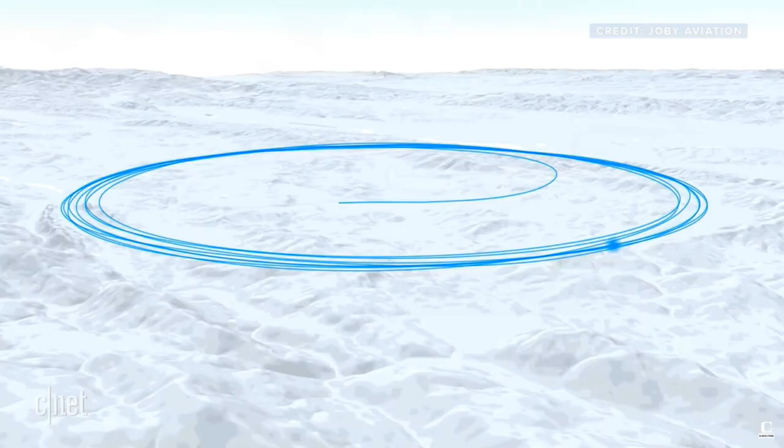Today is a really big day for electric flight. Vertical takeoff and landing, it all happened here.

Just incredibly proud to be a part of this team that's put this together. Both on the flight test side, we have an amazing flight test team, but also just the incredible engineering talent we have. When you've got exceptional people like we have at Joby, then you do exceptional things.

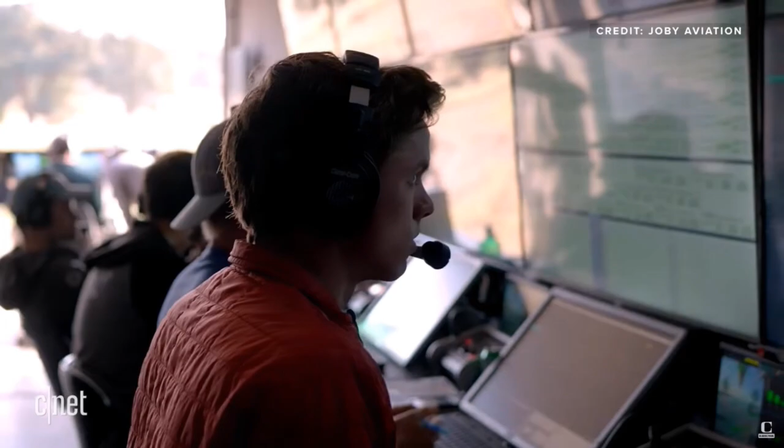We've redefined possible here at Joby. We've shown that with the right people and the right team and the right technology, we can do what everyone else thinks is impossible.

Now, a new transportation reality may be knocking on the door. We're just at the dawning moments of a transportation revolution, which is going to take us into the skies for our daily mobility. This is the electric air taxi from Joby, designed with commuting in mind.

The plan is for customers to be able to book one the same way you'd book an Uber, skip the traffic, and fly. What would be a 49-minute taxi ride from Manhattan to JFK Airport, instead just 7 minutes.

These are built for up to 4 passengers with a range of 150 miles, going 200 miles per hour. And the way they're manufactured, they're actually 100 times quieter than a helicopter.

What's the difference between this and a helicopter? It's dramatically safer, because it has 6 propellers, and each propeller is driven by a separate motor, by a separate inverter, by a separate battery pack, each layer on layer of redundancy.

The air taxis will be manned by commercial pilots. And with a vertical takeoff, they could land on rooftops or parking garages. The electric batteries take just 30 minutes for a full charge, hopefully allowing for cheaper flight costs.

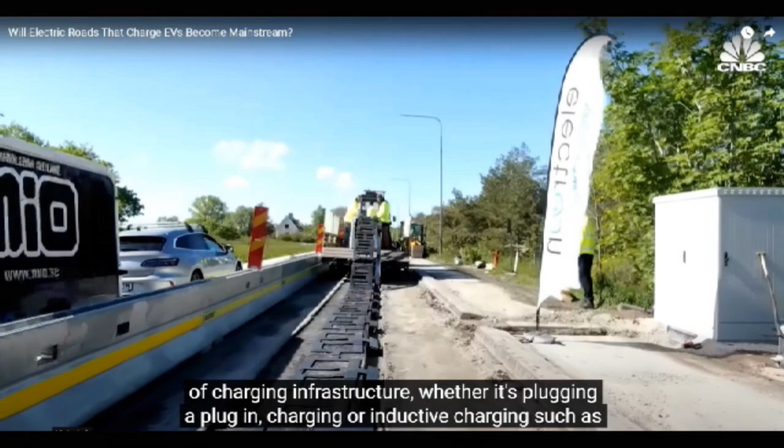such as this project, and create a cohesive environment for people. CNBC explores how electrified roads work and whether they'll become a widely adopted charging solution for EVs.

Electrified roads work a lot like the wireless charging that's in most smartphones. With a transmitter coil in a phone and a wireless charger, a magnetic field is created in between, allowing the phone to receive between 10 and 15 watts of energy without any physical connection.

Now multiply that amount of power by about 3,000, bury the coils under about 4 inches of pavement, add a wireless receiver to an EV, and you have a working dynamic electrified road.

EVs don't currently have receivers allowing a wireless charge, but it's relatively cheap and easy to add, and manufacturers could start to integrate this technology in the future.

This approach is really one that can charge vehicles of any type, meaning vehicles that are buses or vans or passenger cars or trucks, but it can also charge a vehicle while either driving or while standing still.

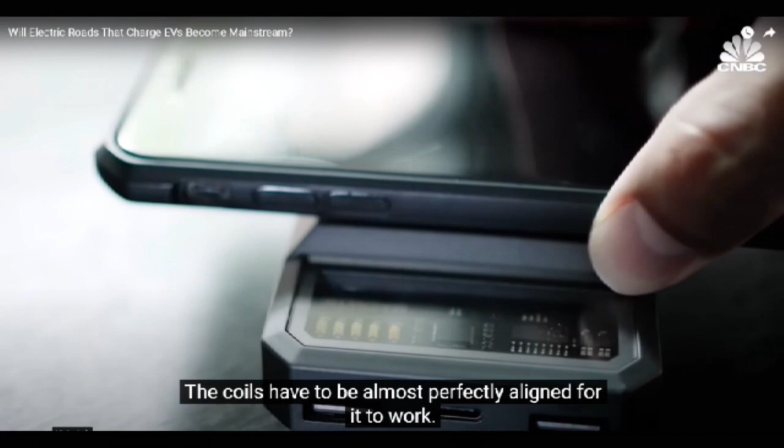For a phone to charge wirelessly, the coils have to be almost perfectly aligned for it to work. But with an electrified road, the technology allows for more leniency, so precise alignment of the coils isn't necessary. So you have a higher tolerance of moving on the road, and having an air gap that's tolerable, which makes it practical for using in everyday operations for cars.

So it is much more of an efficient system, I would say, an optimal system compared to the phone charger, which is more simplistic.

These systems typically connect to the electrical grid. However, electrified roads can also be hooked up to battery hubs, connected to solar panels, or other sources of clean energy, which would make the process greener and allow for electric roads in disconnected areas, like on an interstate highway.

And that's where we see a lot of the benefits as well, both in terms of the environment, but also in terms of economic development. And that would definitely also release some of the pressure on the grid.

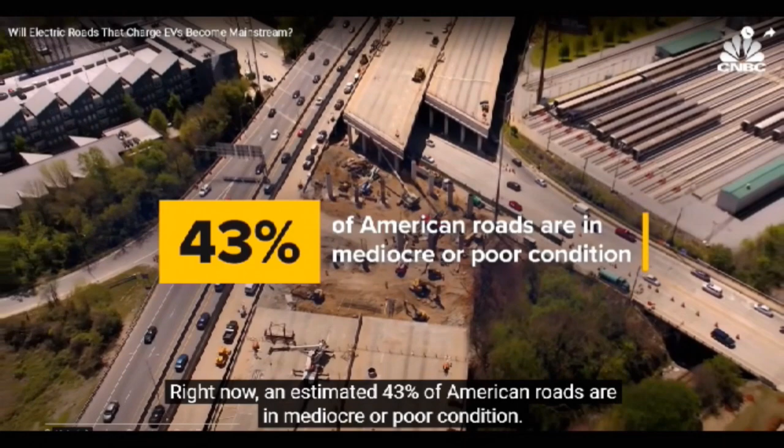Right now, an estimated 43% of American roads are in mediocre or poor condition, and one report showed there's over $750 billion worth of backlogged road and bridge repairs. Some view this as the perfect chance to innovate.

As we rehabilitate a lot of the infrastructure, we know the conditions of our assets here in the US. It's an opportunity to really think about this technology, and it will be much more cost effective to be able

to install and implement this as we, as I said, do more major rehabilitation of interstate highways, tollways, and so forth. Electrifying roads would only add to the hefty price of road repair and maintenance.

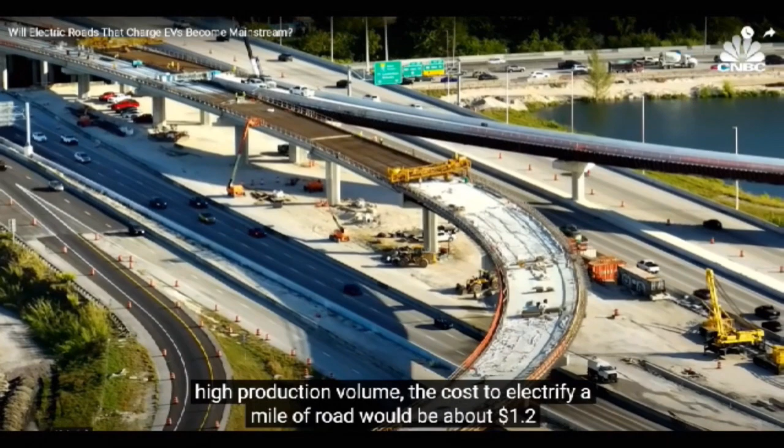Electreon, one company leading the charge on electrified road technology, estimated that at a high production volume, the cost to electrify a mile of road would be about $1.2 million. While reconstruction costs per mile of a road can already cost anywhere between $1.5 to $11 million depending on condition and population density.

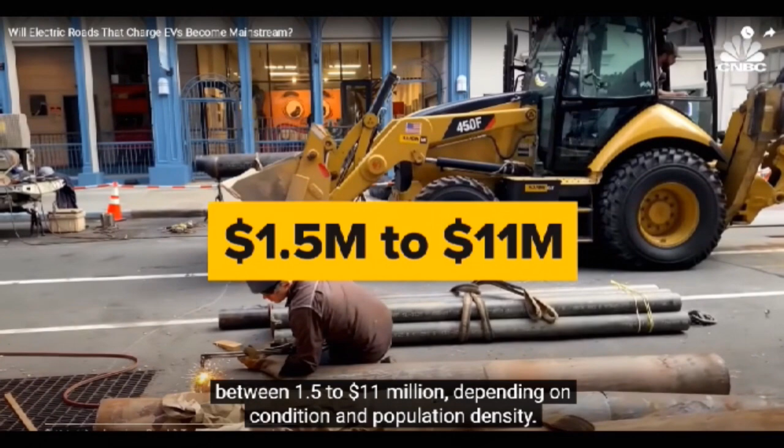Sweden is one of the pioneers implementing this technology in an attempt to reduce the nation's impact on the environment. It has already piloted 4 unique electrified road projects, testing out different electricity conduction techniques.

We have kind of tough climate goals in Sweden. That is, we have to reduce our carbon footprint 70%. If you look at how it looked back in 2014-2015, the battery capacity wasn't like it is now.

So for the heavy transport, we have to look into other solutions. And that was why we went into e-roads.

And now the EU will require all new cars in member states to be electric starting in 2035, adding pressure to improve EV infrastructure. Electreon has several pilot programs in operation, including projects in Israel, Norway, and Italy, among others.

One project in Sweden, which connects the airport to the town of Visby, cost about $10.5 million and was almost entirely financed by the Swedish Transport Administration.

It also has some commercial programs in the works, like its bus project running in Berlin, Germany.

Once all stages of the project are complete, it will have 2 static charging stations and 1 kilometer of dynamic charging, which adds an estimated 2 to 4 kilometers of range to the battery. Electreon is also working with the state of Michigan to pilot a dynamic electrified road in Detroit within the next year, which would be the first in the US. The project costs about $6 million, with the Michigan DOT spending about $1.9 million and Electreon covering the rest.

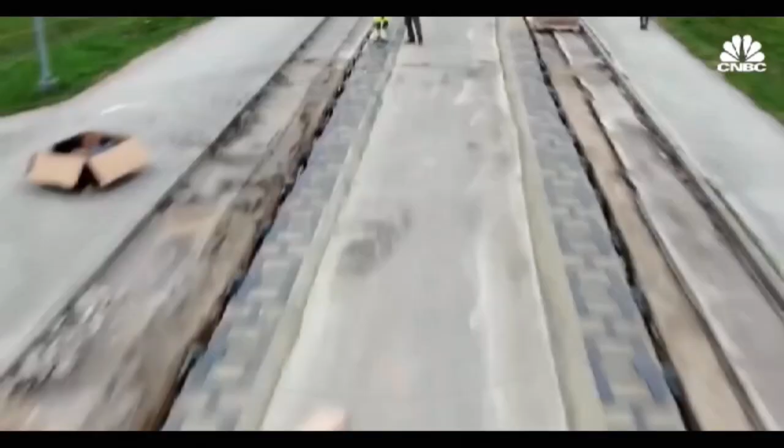While the EV market is growing at rapid rates, charging infrastructure is inherently needed to support that growth. There were about 87,000 electric vehicle charging ports in the US in 2019. Now there's over 160,000 nationwide, nearly doubling in just 3 years. But studies show the US needs 8 times more charging stations by 2030 to handle the coming wave of EVs.

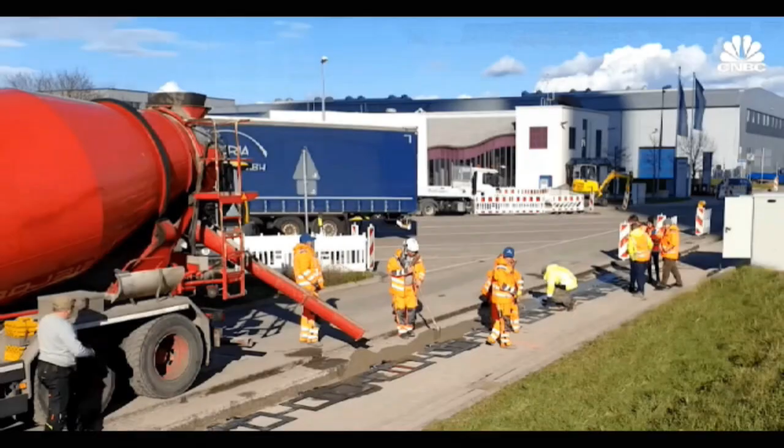But right now, the vast majority of working electrified road projects are temporary, either case studies or pilots. The important thing is that the technology is here, it's there for commercial use and deployment. And so we're working with the right entity to first do these pilots where you get all the ecosystem together, from the vehicles, from the road construction, from the public authorities, and getting the permits and all these things, and the use cases. Once we put that together, then you enable a platform to grow in the state, in the city, in the country.

It would also be extremely costly to electrify every road, so while it likely won't be a regular road replacement, it could fit well in certain target areas like exit ramps, intersections, and high-traffic streets. We don't view 100% of roads being electrified, but we definitely see this technology being viable, both financially and also essential in rural areas where we might not have a lot of charging stations, or what we call charging deserts.

I expect that we'll have focus on certain regions where this is widely adopted in a city for commercial fleets. And I think in 10 years, I foresee a scenario where we also have intercity roads between regions that have electric corridors. We're gonna rock down to Electric Avenue, and then we'll take it higher.

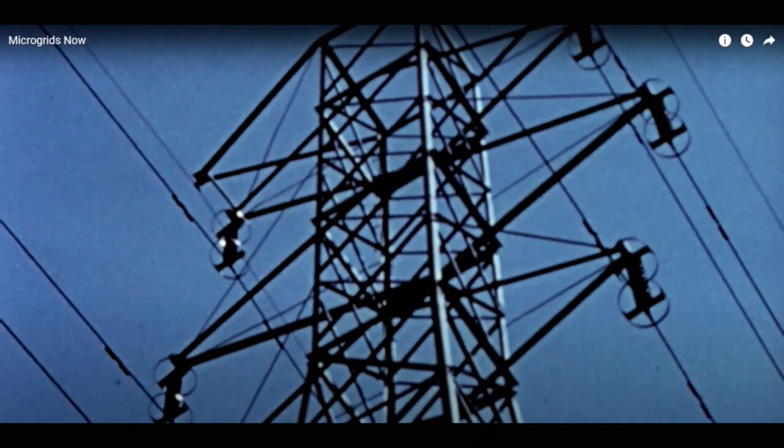The 1950s was a decade of breakthroughs for America. The first computer modem, the first transistor radio, and most of the transmission towers we rely on today for electric power were built in the 1950s. The life expectancy for this national network of towers was approximately 50 years. Our grandparents' grid system is way past its prime. It's unreliable, dirty, and expensive, and it can't handle the demands of the 21st century.

It can't handle threats of cyber warfare. It can't handle extreme weather events. It can't ensure that critical facilities like hospitals stay functioning when the lights go out. One transmission failure can ripple through many communities. Our traditional grid system also fails to handle the increasing demand from new technology. Now is the time to reimagine our electric systems.

One way to power into the future is with microgrids. Across the U.S., small-scale power networks called microgrids are emerging as the smart solution to our failing national grid system. By integrating multiple renewable power sources like solar, wind, and battery storage, microgrids can maximize efficiency and ensure uninterrupted power. What's more, these revolutionary systems can address climate change and help us transition from fossil fuels to clean energy without being disruptive.

We need microgrids today because our grid is brittle and it needs to be brought into the 21st century where we're facing real climate risks, real disruptions. We have a pathway to clean energy and to distributed energy that microgrids enable.

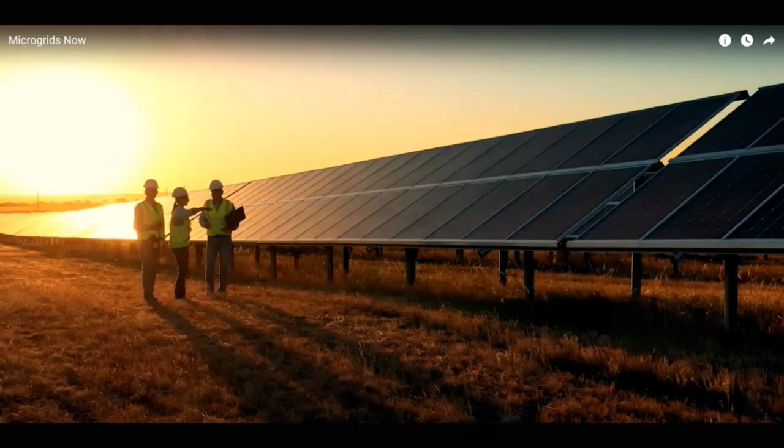The thing about microgrids is that because they're deployed at the local level, they also provide high-paying, good quality jobs in the communities that need them. According to a 2021 Economic Impact Report by Guidehouse, microgrids powered by renewable energy will generate nearly 500,000 new jobs, 72 billion in GDP growth, and 146 billion in business sales by 2030.

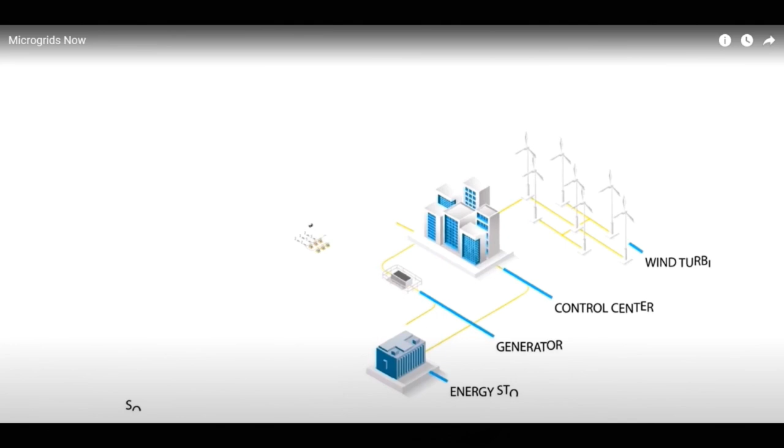Microgrids also address one of the biggest inefficiencies of the centralized system, which is moving power from one place to another. With the central electric grid, significant power is lost when it has to travel miles and miles across transmission lines. Microgrids are more efficient because energy is created very close to where it is used, which, in addition to efficiency, also means savings to consumers.

By some estimates, as much as 15% of the power generated by power plants is lost by the time that it reaches the consumer. Society pays the price for that in the form of higher energy costs and environmental harm. Microgrid technology will enable decentralizing the electric grid, which will have security benefits. Also, communities will feel the economic benefits of electrification.

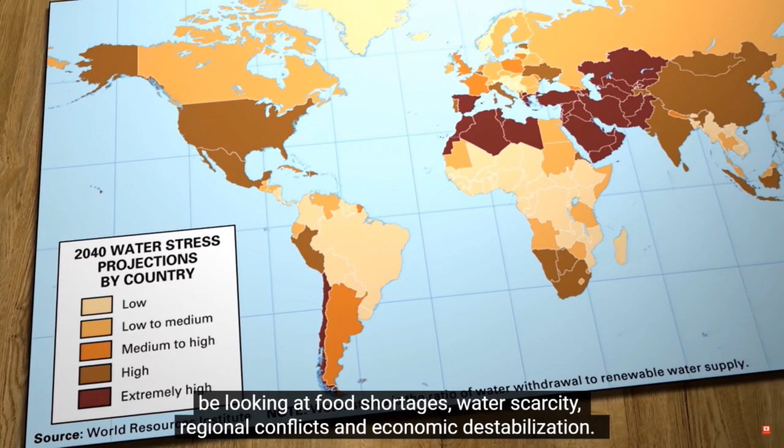If nothing changes at all, then we will quite likely be looking at food shortages, water scarcity, regional conflicts and economic destabilisation. So all sorts of agricultural systems are now being developed and promoted all over the world to try and make the whole thing more sustainable.

And one of the ideas gaining a lot of interest right now is to combine food production with energy production in a concept known as agrophotovoltaics or agrivoltaics, or just APV for short. There's a strong clue in the name, of course, and sure enough, in very basic terms, it means putting solar panels in a field where crops are also grown.

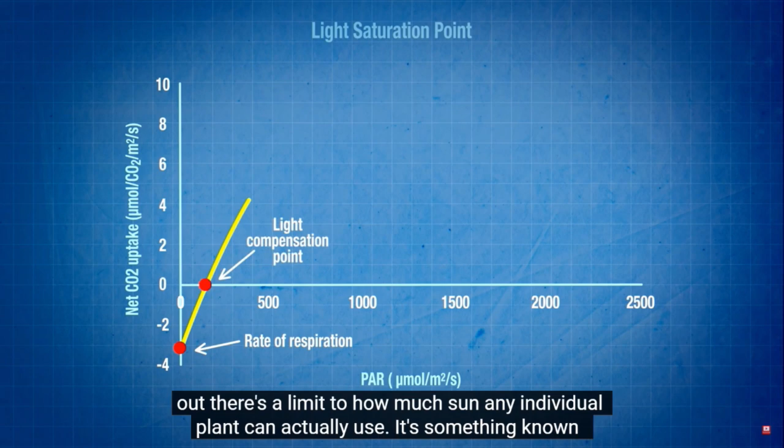So how does it work in practice, and what do we gain from doing it? Well, it turns out there's a limit to how much sun any individual plant can actually use. It's something known as the light saturation point. Any extra light received beyond that point makes no difference at all to the plant's photosynthesis. All it does is make the plant sweat, which makes it more thirsty.

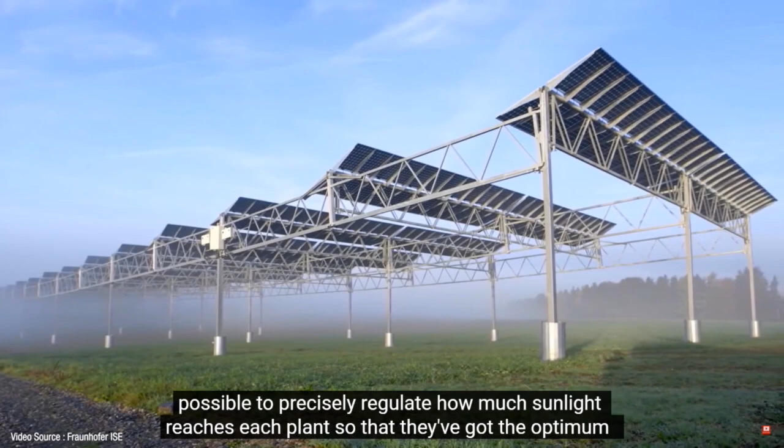So by strategically placing solar panels directly above a crop growing area, it's theoretically possible to precisely regulate how much sunlight reaches each plant, so that they've got the optimum level for maximum growth with minimum water loss. All the excess sunlight that would otherwise be wasted on the plants would then be captured on the upper side of the solar panels to generate energy.

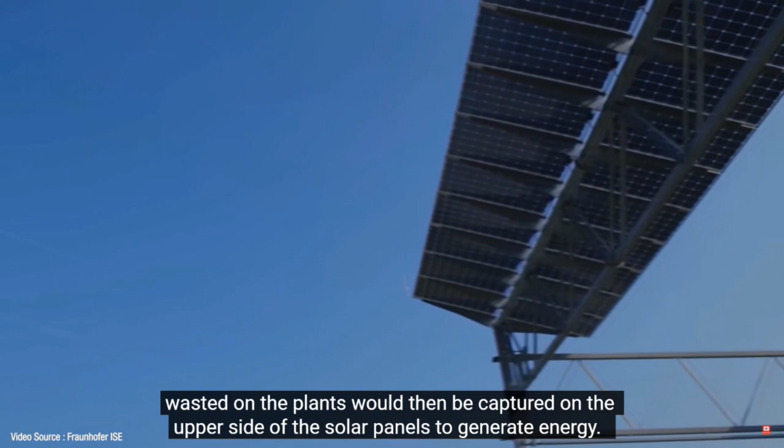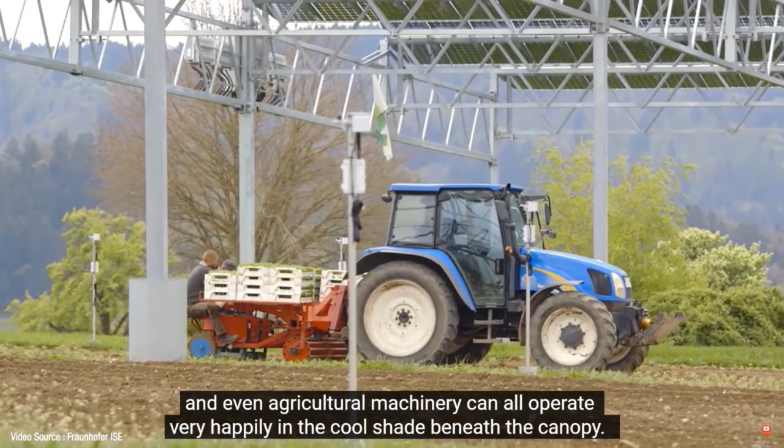And if the panels are raised up high enough above the ground, then livestock, farm workers, and even agricultural machinery can all operate very happily in the cool shade beneath the canopy. And it's not a one-way street either. It's a mutually beneficial, symbiotic relationship.

As the plants grow beneath the panels, they help to keep the panels cool. Ironically, solar panels don't actually like getting hot. It reduces their operating efficiency. So anything that can draw heat off them will help to make the panels more productive.

According to a study by Oregon State University, panels positioned correctly above plants can produce as much as 10% more electricity. And that electrical energy can be used to run the farm with electric tractors and equipment, and to power precision agricultural technology that helps further reduce water usage. All of that obviously reduces the running costs for the farm, and any surplus energy can be stored in battery banks or sent to the grid for consumer use.

So you're effectively using the sunlight twice, to grow cash crops and to generate a second income stream from the solar power generation. Farmers all over the world are finding it increasingly difficult to make ends meet without huge government subsidies. In the USA, that struggle is starting to nudge towards something more like an existential crisis, as trade wars, commodity prices and climate change all combine into a perfect storm of economic disaster.

Between 2011 and 2018, more than 100,000 farms were shut down across America. So the ability to use the land more profitably while still providing crops for the nation is a potential lifeline that could keep many farmers from going bankrupt.

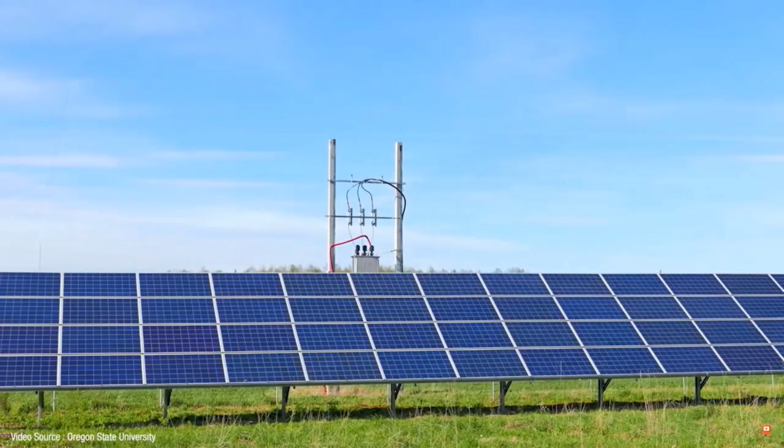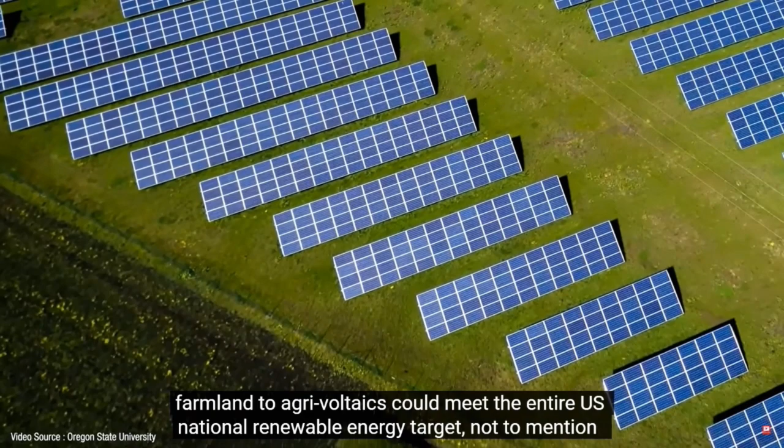And the OSU study also calculated that converting just 1% of American farmland to agrivoltaics could meet the entire US national renewable energy target, not to mention saving a significant amount of water and creating sustainable long-term food production systems. But it's not just happening in America. APV technology is being quite enthusiastically embraced all over the world.

Japan implemented 654 projects between 2013 and 2018, with a peak generating capacity of about 150 megawatts. South Korea currently have about 2 megawatts worth, and of course the mighty China, who, as we've learnt on so many occasions on this channel, never ever do anything on a small scale, installed an estimated 4 gigawatts of agricultural PV capacity just in the 3 years between 2015 and 2018.

Over here in Europe, according to this report by Agora Energiewende and the British think tank Ember, 2020 marked the first time that the EU generated more power from renewable sources than from fossil fuels. Renewable energies made up 38% of the European energy mix in 2020, compared with 37% from oil, gas and coal. So the potential for agrivoltaics here is huge. France is already getting involved, led by the winemaking industry.

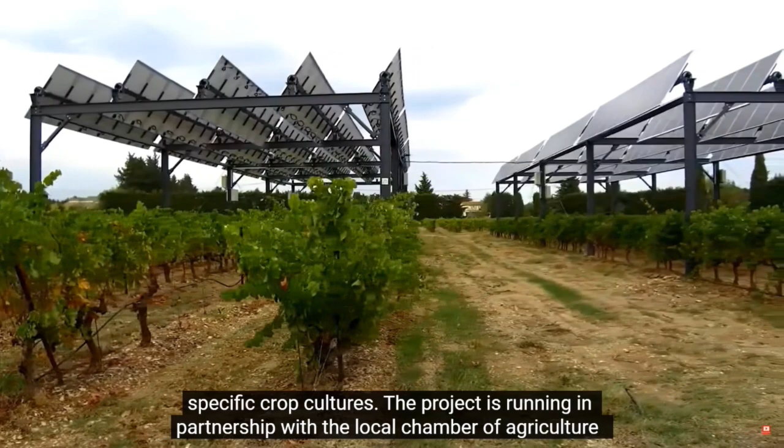Sun Agri, a subsidiary of French solar developer Sun-R, has installed a viticulture agrivoltaic system in the wine growing area of Piolenc in Vaucluse in southeastern France as part of a programme to test how agrivoltaics perform in specific crop cultures. The project is running in partnership with the local Chamber of Agriculture as part of a programme supported by the French Environment and Energy Management Agency.

In a recent interview with PV magazine, a Sun Agri spokesperson said vines are among the crops most affected by the effects of climate change, so it's essential that they be at the heart of our experiments.

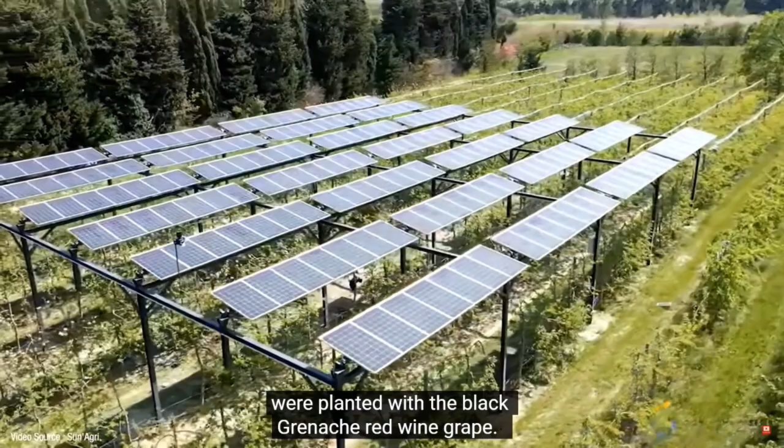1,000 square metres of vines in the test area were planted with the black Grenache red wine grape. 600 square metres were covered by a system of 280 panels with a generation capacity of 84 kilowatts.

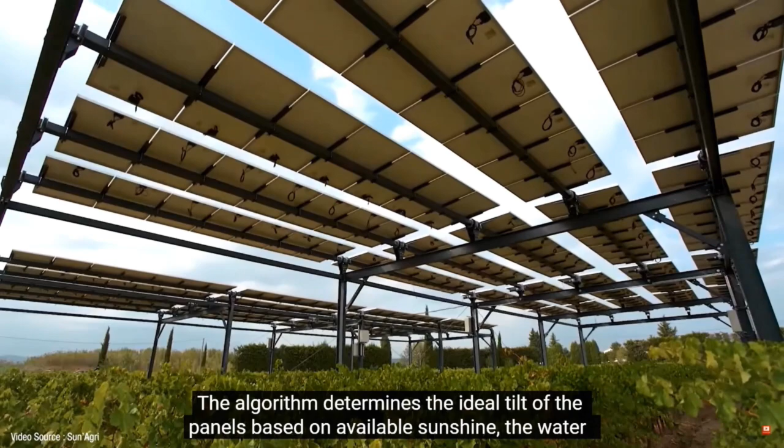The panels were mounted 4.2 metres, or about 14 feet, above ground, and are remotely controlled by an artificial intelligence algorithm that SunAgri have been developing for more than a decade. The algorithm determines the ideal tilt of the panels based on available sunshine, the water requirements of viticulture, the growth model of the crop, as well as soil quality and weather conditions.

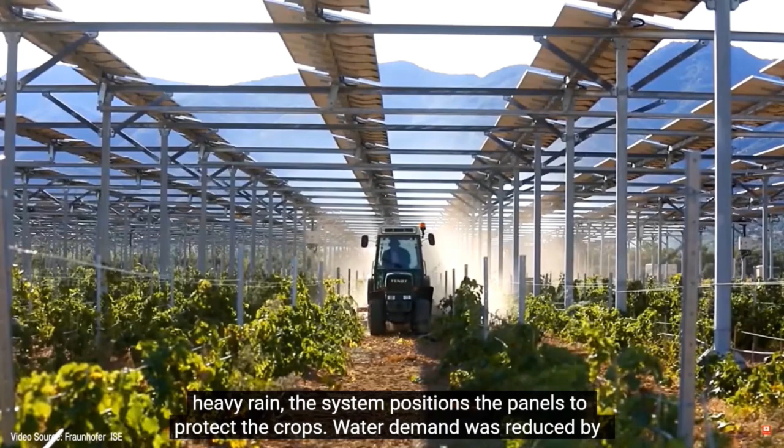In the event of extreme climatic hazards like drought, heat wave, hail, frost or heavy rain, the system positions the panels to protect the crops. Water demand was reduced by as much as 34% in the PV sheltered vines, thanks to that reduction in evapotranspiration that we looked at earlier.

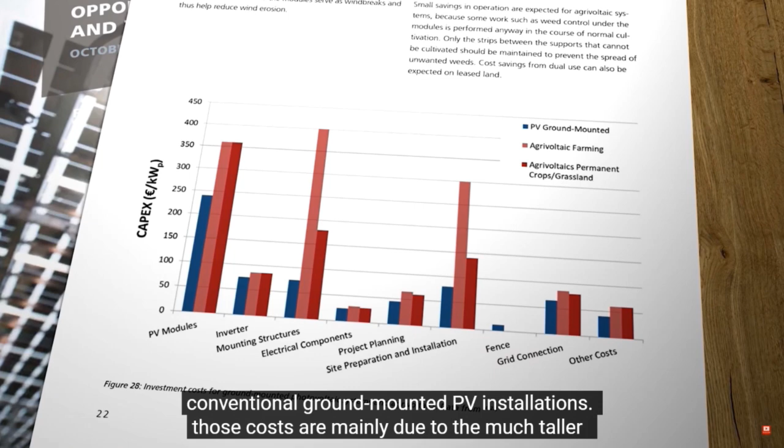There are some challenges that could stand in the way of widespread use of agrivoltaics though, as this recent research paper by the German Fraunhofer Institute points out, not least of which is the higher initial capital costs compared to conventional ground-mounted PV installations. Those costs are mainly due to the much taller support systems used for the modules, as well as the need for site-specific system design.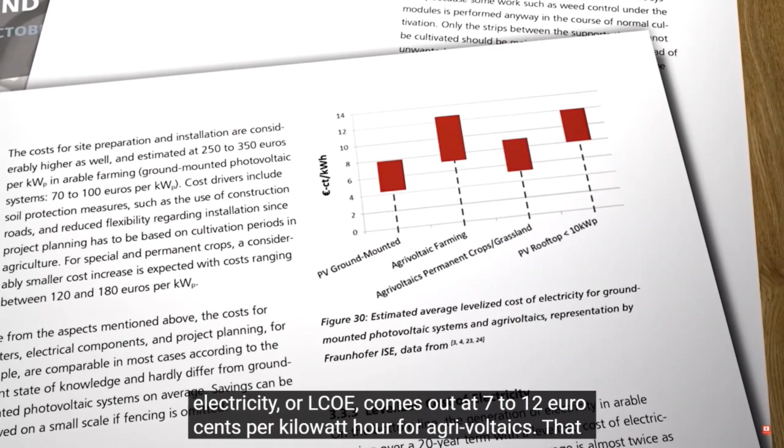But the report also found that compared to other renewable energy sources today, APV overall looks quite competitive. The industry comparison standard known as levelized cost of electricity, or LCOE, comes out at 7 to 12 euro cents per kilowatt hour for agrivoltaics. That is higher than the ground-mounted systems, but it's already comparable with small rooftop PV systems.

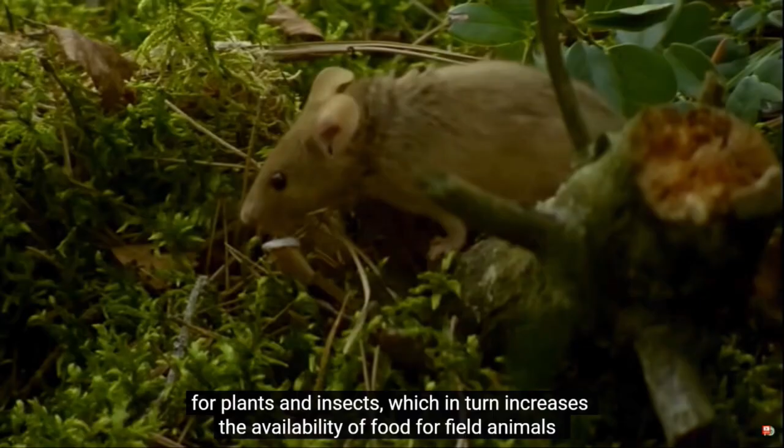As a bit of a bonus, freestanding APV installations also provide a valuable habitat for other plants and wildlife. With careful management, the extra protection from excess harmful sunlight improves the health of the soil and increases the level of nutrients, creating important ecosystems for plants and insects, which in turn increases the availability of food for field animals as well as birds and bats.

Agrivoltaic technology itself is improving all the time. Panels can now be made translucent to allow finer control of the amount and specific wavelengths of light that are either absorbed by the panel or allowed through to reach the crops. And there are even completely mobile PV systems like this one from US company Tracker Sled, providing plug-and-play style modularity and mobility regardless of what type of terrain or topography it's deployed on.

Despite the fact that the basic principles of APV have been known for about 4 decades now, the industry is still young and it's only recently started to evolve. Research is ongoing to find the best ways to adapt the system for producing as many types of fruit and vegetables as possible, and clearly more work needs to be done to ensure it's economically viable on a global scale. But agrivoltaics do look very promising, and the technology could play a major role in defusing the current conflict between agricultural landowners and solar developers, especially in higher populated countries where space is at a premium.

With extreme weather as a more common effect of climate change, we obviously need to pay attention to our food supply.

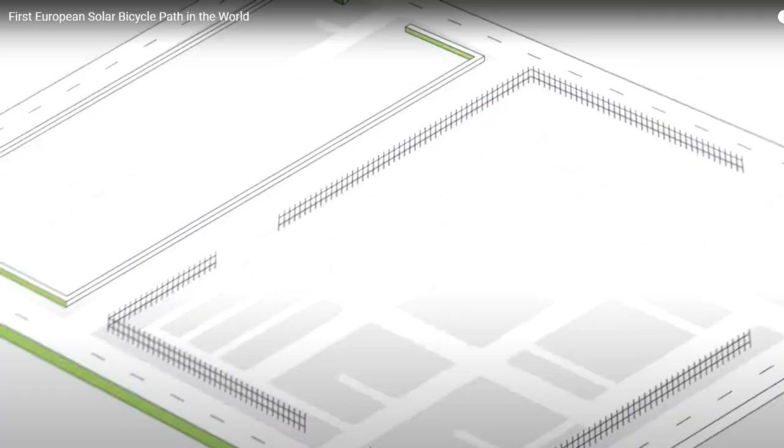Panels are now everywhere, over rooftop, on the water, or even in space. But can you imagine that solar panels are now operating on roads, literally? Two groundbreaking PV bike path initiatives are now operational in the Netherlands.

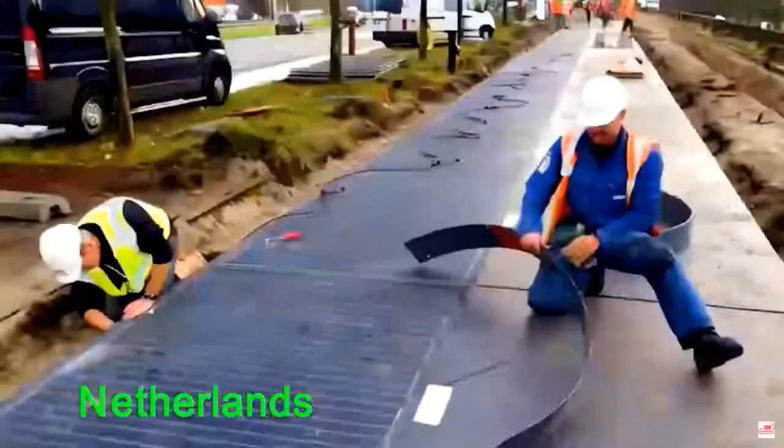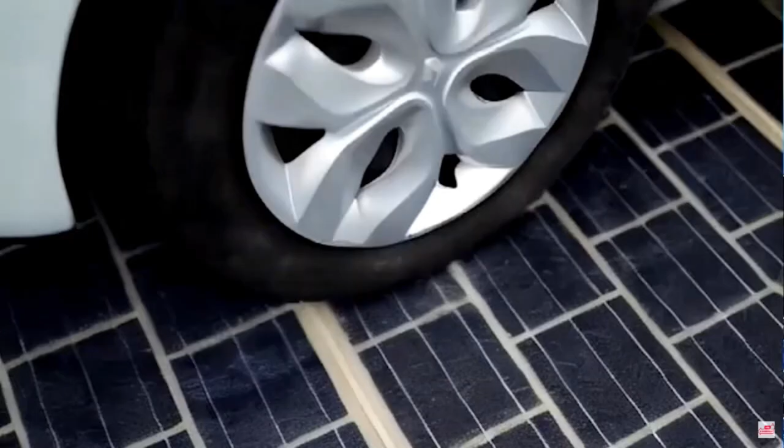Initiated in 2018 by Rijkswaterstaat, the Dutch water management agency, these innovative solar bike paths are the result of collaboration between French company Colas and Dutch construction contractor Royal BAM Group. The first path is located in North Brabant, and the second is in North Holland, each covering an impressive 1,000 square meters. Equipped with PV module technology boasting 21% efficiency per square meter, these solar cells are not only cutting edge but also environmentally friendly.

What makes these paths unique is the meticulous design that ensures the solar cells are safeguarded by a resin multilayer. This not only protects the cells from wear and tear but also adds a layer of durability to the infrastructure. Moreover, the electrical architecture is carefully planned to minimize wiring, showcasing a commitment to both efficiency and aesthetics.

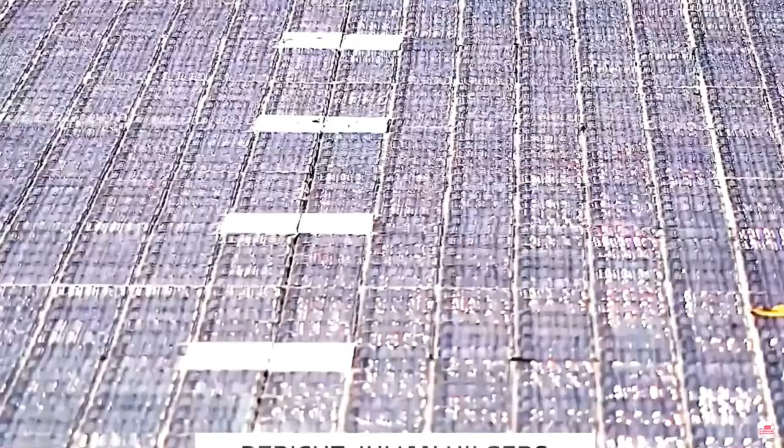The paths are expected to generate an impressive 160 MWh of renewable energy, contributing to a more sustainable future.

These initiatives are part of Rijkswaterstaat's 2018 project, aligned with the Dutch Ministry of Infrastructure and the Environment. Now let's talk about the bigger picture of solar roads in the Netherlands.

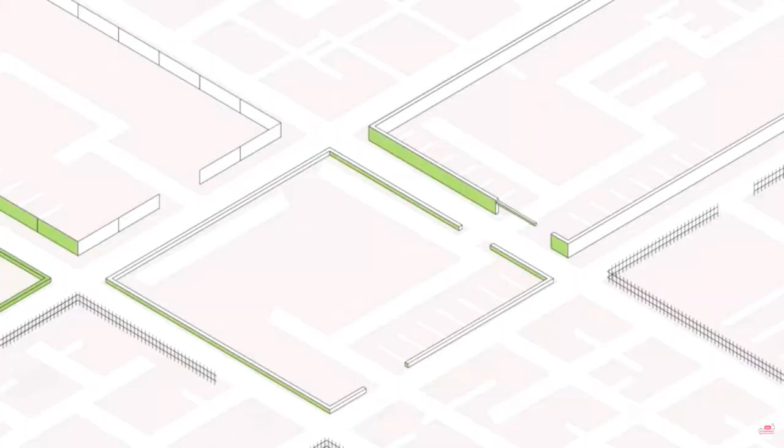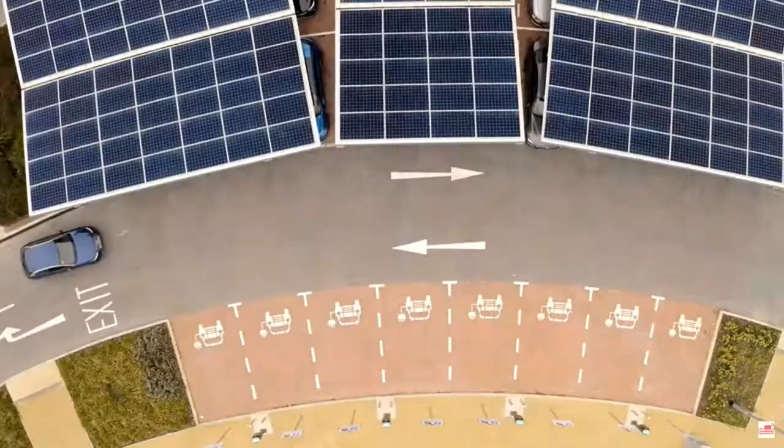Solar roads aren't a new concept in the Netherlands. In 2016, a solar panel-equipped bike path near Amsterdam paved the way, followed by another in Utrecht in 2020. However, the practicality and economic viability of solar roads have been subjects of debate.

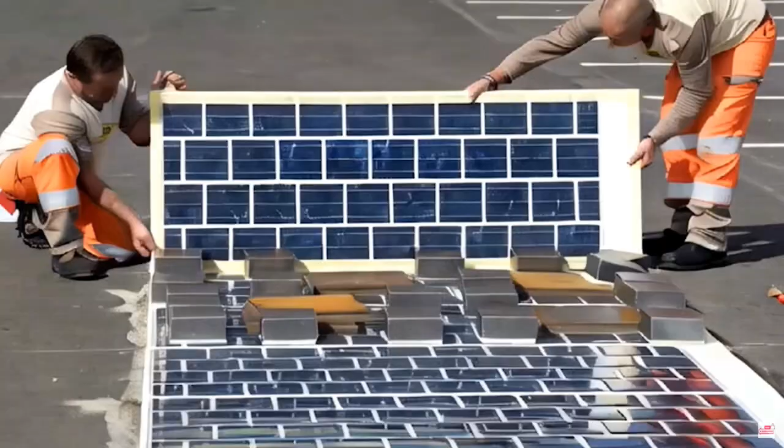To further explore solar power production on road infrastructure, the Dutch government is working on a plan involving solar installations along highways and noise barriers. This comes as a response to the challenges posed by the scarcity of land for large-scale PV plants. Researchers and private companies are also exploring alternative surfaces for solar projects, including dikes, rooftops, and onshore and offshore water areas. This comprehensive approach showcases the commitment of the Netherlands to finding innovative solutions for sustainable energy production.

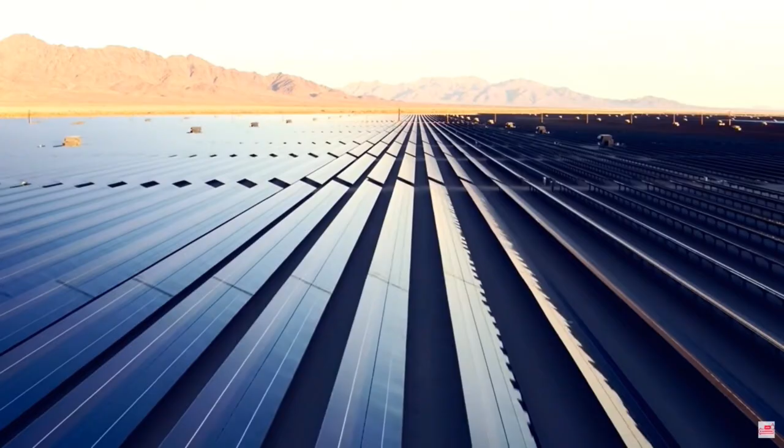So, are there other benefits? A recent study indicates a 10% increase in cyclist satisfaction due to the shaded and well-lit paths. Additionally, the excess energy generated is being redirected to power nearby streetlights, further optimizing energy usage in the community.

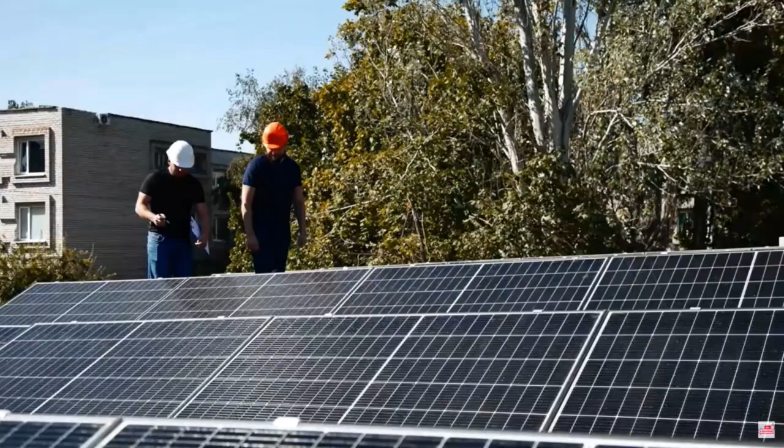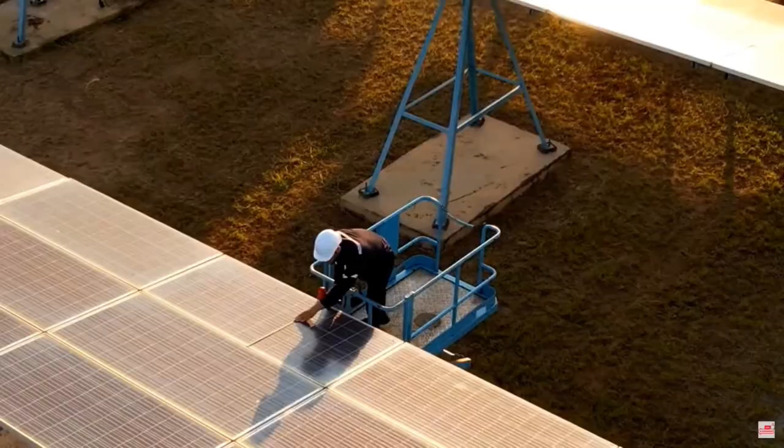While the benefits are clear, let's address some expected drawbacks. The initial installation costs were high, but the long-term benefits in energy production and community satisfaction are beginning to outweigh these upfront expenses. Moreover, concerns were raised about maintenance costs. However, ongoing technological advancements are reducing the need for frequent maintenance, making these solar paths more economically viable over time.

Another challenge is the seasonal variation in sunlight. To address this, researchers can explore energy storage solutions such as advanced batteries to ensure a consistent and reliable power supply, even during cloudy days.

In general, the Netherlands' solar bike paths are proving to be a successful venture, offering not just green energy but also improved infrastructure for cyclists. As technology evolves, the drawbacks are being addressed, making solar roads an increasingly practical and sustainable solution.

This video shows us technology that will allow us to generate electricity closer to where it will be used. Sidewalks and driveways are other potential applications.

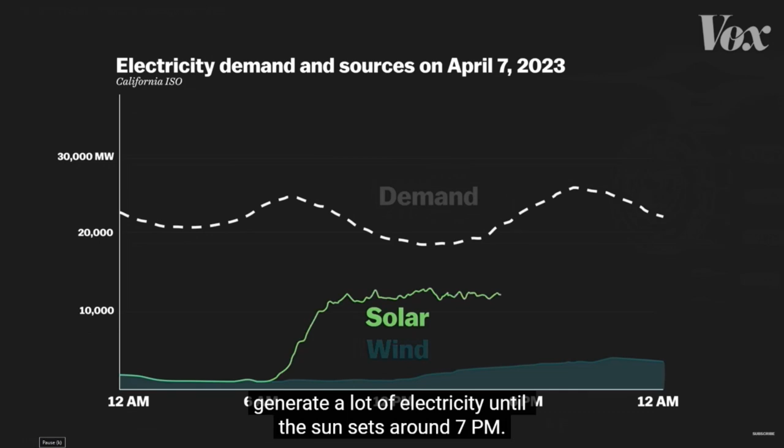This is the typical demand for electricity on a spring day in California. It starts growing around 6 a.m., then rises again around 6 p.m. Now, this line shows when wind power feeds the California power grid. Wind is variable, but often picks up at night. Solar panels, on the other hand, kick into gear around 7 a.m., generate a lot of electricity until the sun sets around 7 p.m. On most days, neither comes close to meeting the peak demands of the day.

So, the power company relies on fossil fuels, like natural gas, to make up for the gap, which widens significantly when people use electricity the most. Since the power company can't store the solar and wind energy, it has to use fossil fuels at these times, which can be stored in barrels and tanks. It's kind of the big gap in our renewable energy system right now. If we don't figure out a way to store renewable energy, there's a chance that we're going to be still dependent on fossil fuels. So how do we store some of this solar and wind energy for later?

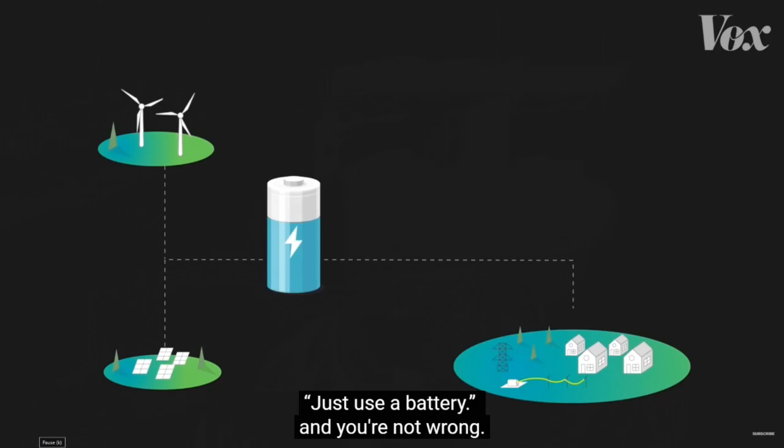Right now you might be thinking, just use a battery. And you're not wrong. Batteries have improved immensely over the past few years, particularly lithium-ion batteries, which use a chemical reaction to store energy. Individual homes that have solar panels often use lithium-ion batteries to store energy, but there's a few reasons lithium-ion isn't perfect for the grid.

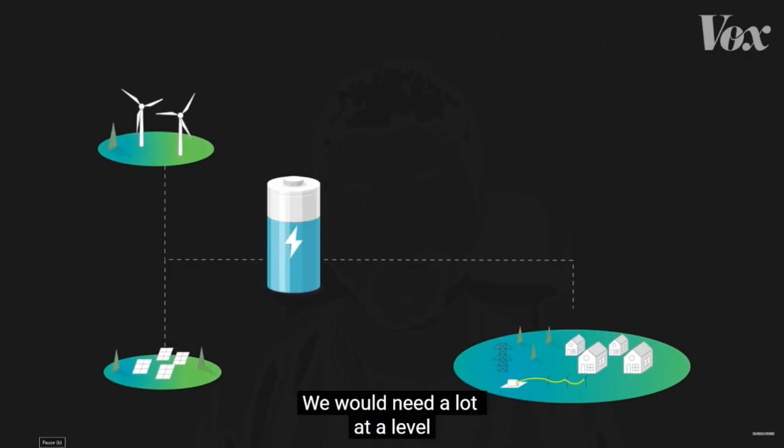This is Neel Dhanesha, a founding writer at Heatmap, a climate news site, and he wrote about this for Vox in 2022. One is just the scale that's needed. We would need a lot at a level that we just don't really have right now. That's a challenge because lithium is only found in a few places on Earth. But more importantly, we need lithium-ion batteries for other things.

Lithium-ion battery is really good for stuff that moves because it's relatively light. Meaning it's better suited for things like electric cars and portable electronics, not power grids that stay still. Luckily, there's another energy storage solution that's actually been around for a long time.

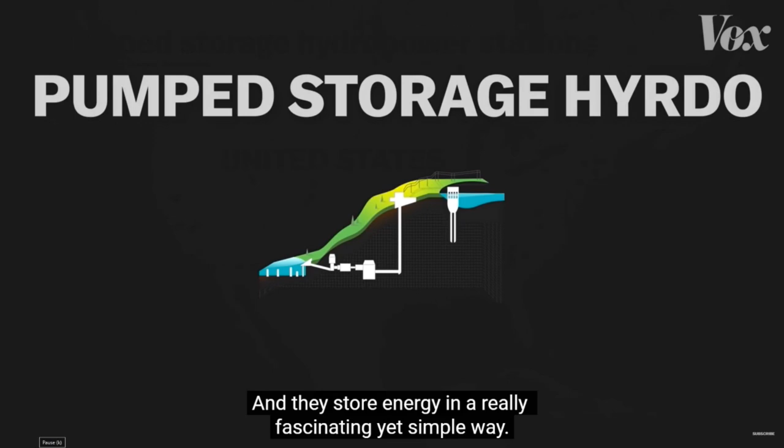Today, these facilities are all over the world. There are 39 of them in the US. And they store energy in a really fascinating yet simple way. When energy demand is low, renewable or fossil fuel energy is used to pump water from a reservoir or river up a mountain into a higher reservoir, basically converting this energy into what's called potential energy.

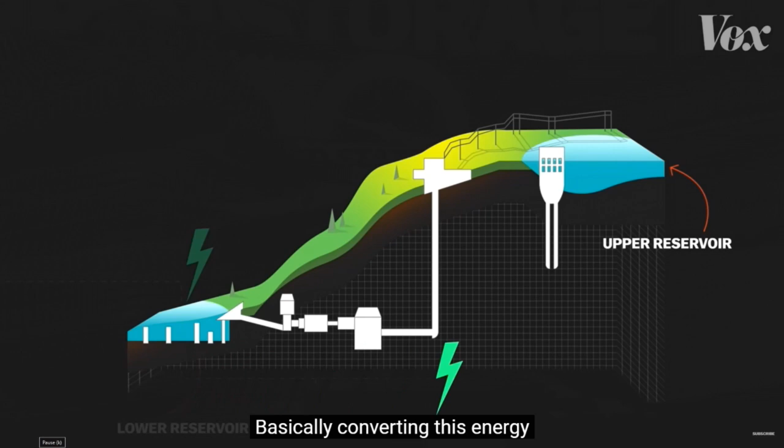So potential energy, you might kind of remember from high school physics. When a thing is up at a height, it has stored potential energy. When it's let go, it turns into kinetic energy.

When that energy is needed, the water is released down the mountain, where it's converted into kinetic energy that spins a turbine and generates electricity for the grid. It's a way of combining water, a mountain, and gravity into a battery, and it can be about 90% efficient, meaning only 10% of this energy is lost in the process.

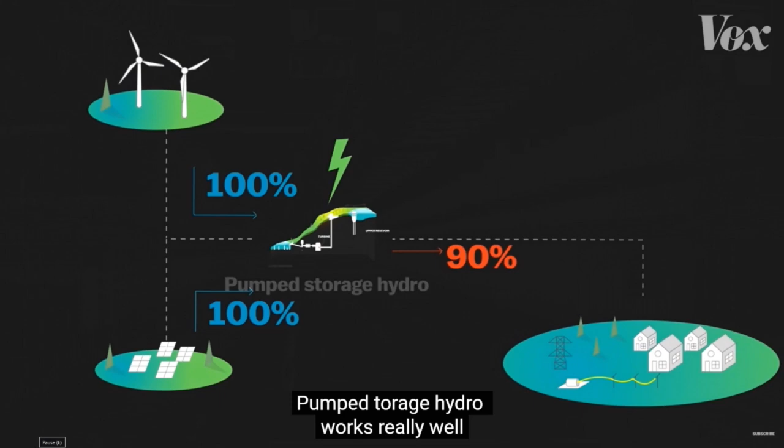Pump storage hydro works really well, but it's difficult to build more. For starters, you need a mountain, and you need to hollow out a mountain to put pumps inside it, and it takes a lot of money, and we don't have mountains everywhere.

So the ideal way to store renewable energy would be something that's cheaper and smaller than a pump storage hydro plant, but works in roughly the same way.

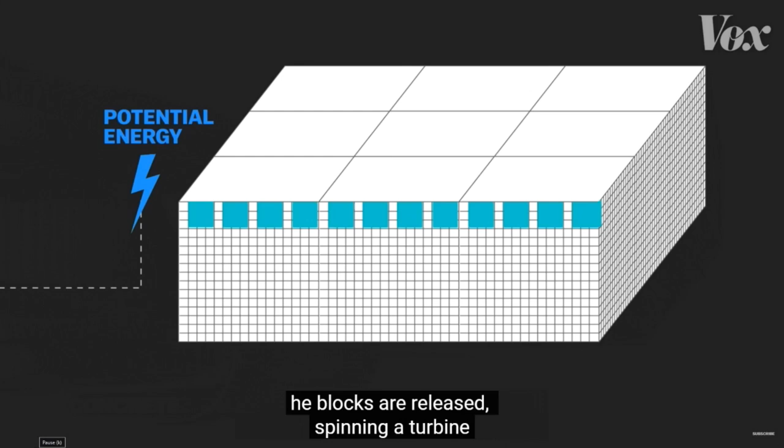One company, Energy Vault, is also using gravity to store renewable energy, but without the water or mountain. Instead, renewable energy is used to lift heavy blocks of concrete up into the air, where it becomes potential energy. Then, when it's needed, the blocks are released, spinning a turbine which converts the potential energy back into electricity.

Energy Vault calls this gravity energy storage, and while it's still being tested, the company claims it could be more than 80% efficient. A company called Quidnet is working on a different version of the same principle.

Their geomechanical pump storage unit uses renewable energy to pump water underground into a pressurized hole, where it can be stored as potential energy, then released back up to the surface to spin a turbine and generate electricity.

Both techniques are betting on potential energy as a solution for storing renewable energy for the grid. I think this is partly because potential energy has shown itself to be pretty efficient. Also, realistically, there are fewer moving parts. If all you're doing is basically using gravity to work with you, you have a pretty massive force of nature on your side right there.

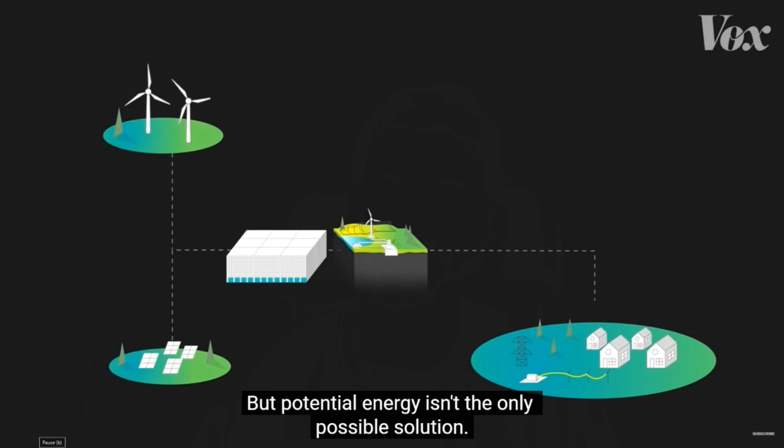But potential energy isn't the only possible solution. Other companies are using renewable energy to superheat salt, insulating it, then releasing that heat to create steam or hot air to drive a turbine. Basically storing renewables by converting them to thermal energy.

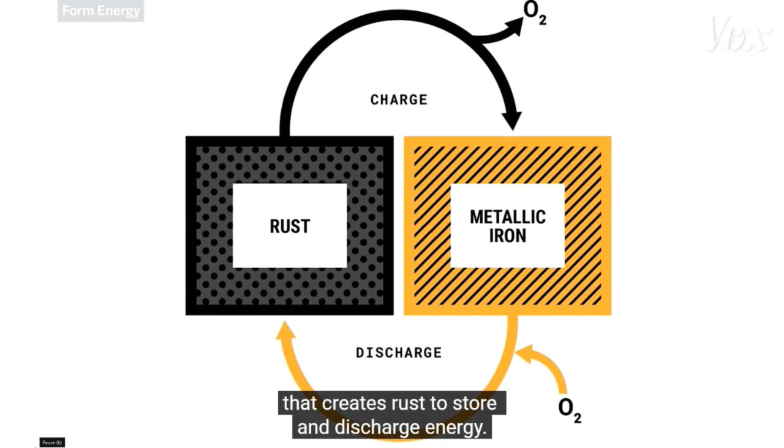Then there's a company that's betting on rusted iron. They're called iron-air batteries, and what they do is utilize the chemical reaction that creates rust to store and discharge energy. This thing that we all sort of think of as an inconvenience could be really useful is just kind of beautiful to me.

Right now, these ideas are all in various stages of development, but they are attracting investors. And the hope is that several will work, because one might not fit every power grid. The grid, like renewable energy overall, is going to be a sort of patchwork solution. And so the more we try these solutions, the closer we get to figuring out exactly what the right mix is for what we need for the grid of the future.

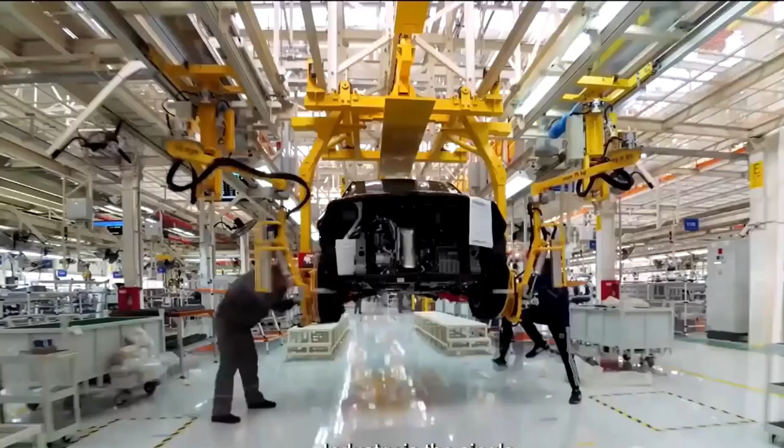Industry is the single largest user of energy in the world. Decarbonizing industry becomes a more and more critical portion of getting to zero. Industry is a place where it's really hard to have a green premium, because whether you make cement or baby food, that's a low margin commodity, and energy is a huge portion of the cost of producing those commodities.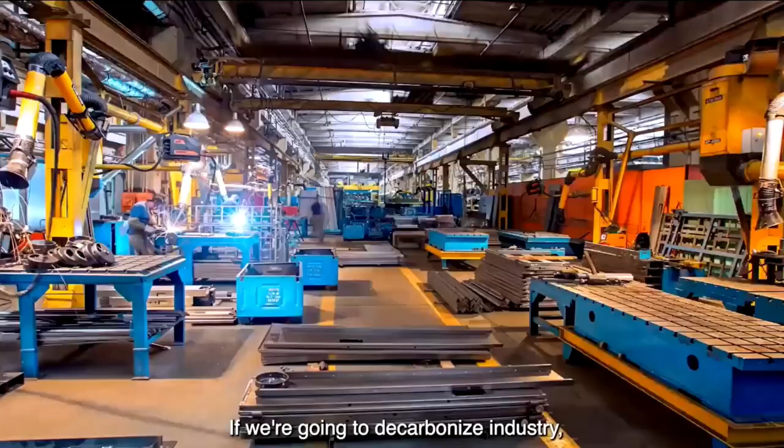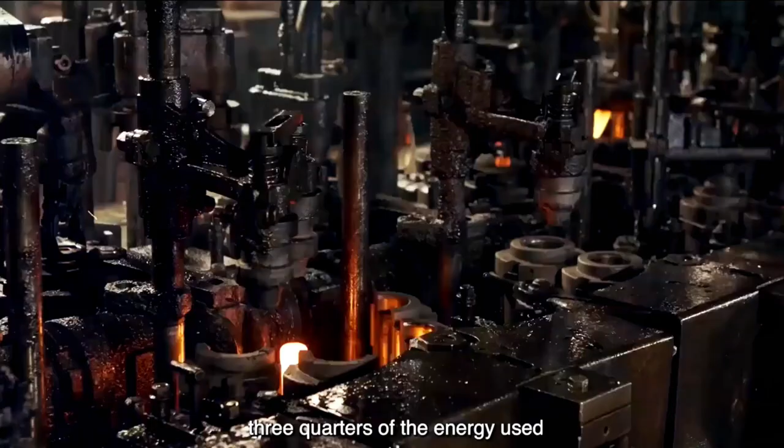If we're going to decarbonize industry, we need a replacement for fuel that is not more expensive. We have intermittent wind and solar energy that are now cheaper than burning fuel. It's a hard problem because three-quarters of the energy used by industry is in the form of heat, not electricity.

Rondo is building a new class of solution to solve that problem. Our breakthrough was figuring out how to do heat storage from intermittent electricity at very high temperatures and deliver continuous industrial heat. We found a unique way of combining the same wire that's in your toaster with a pretty ordinary brick.

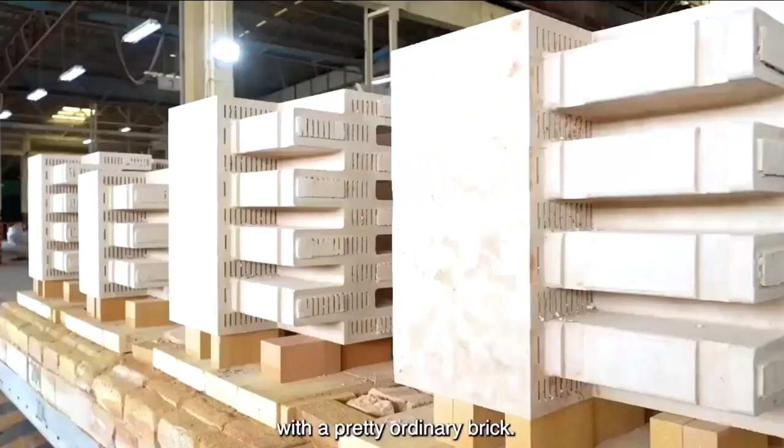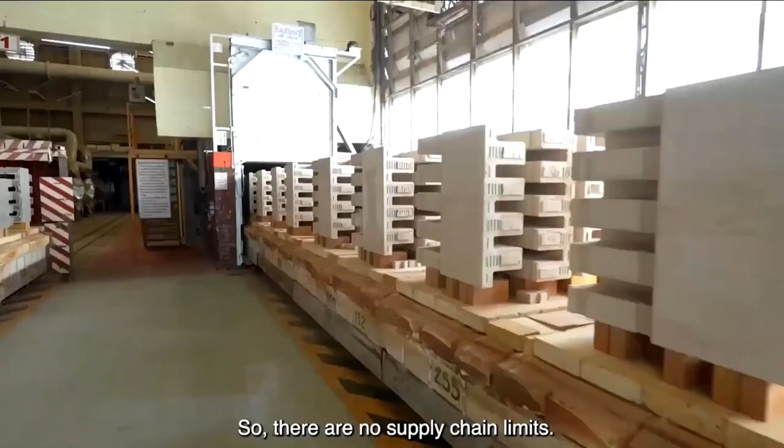It's a higher temperature brick. They call it refractory. It's made from silicon, oxygen, and aluminum, 80% of Earth's crust. So there are no supply chain limits. We heat brick with toaster wire. It doesn't get cheaper than that.

About 95% of all the industrial heat in the world is serviceable from the current Rondo technology. We are now running on a go-fast basis of several hundred projects around the world. We are at a renaissance right now of investigating how to store electricity for industrial heat. It is an exciting moment.

Energy storage, both for electricity and heat, represents an important step in full electrification. San Diego's San Vicente Energy Storage Project will offer an important hydroelectric storage solution, which will be supplemented by other technologies.

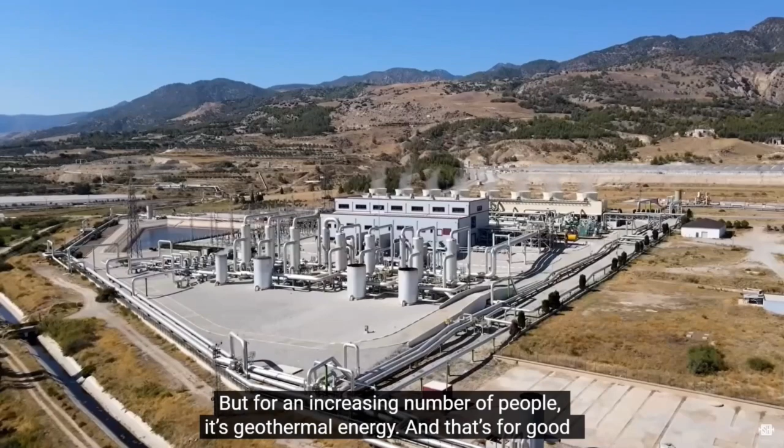For an increasing number of people, it's geothermal energy, and that's for good reason. We sit on a big hot ball of molten rock, and it seems like the obvious thing to do. But in contrast to nuclear fusion, where every small step gets huge press attention, no one ever talks about what's going on with geothermal energy. No one besides me, of course, because in the past months a few very interesting things have happened.

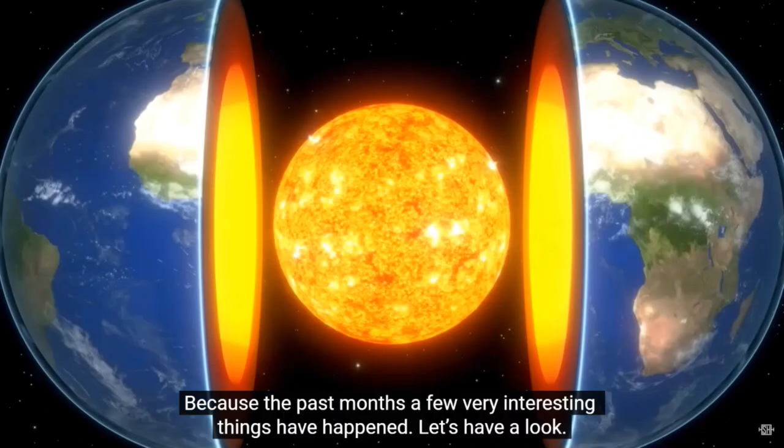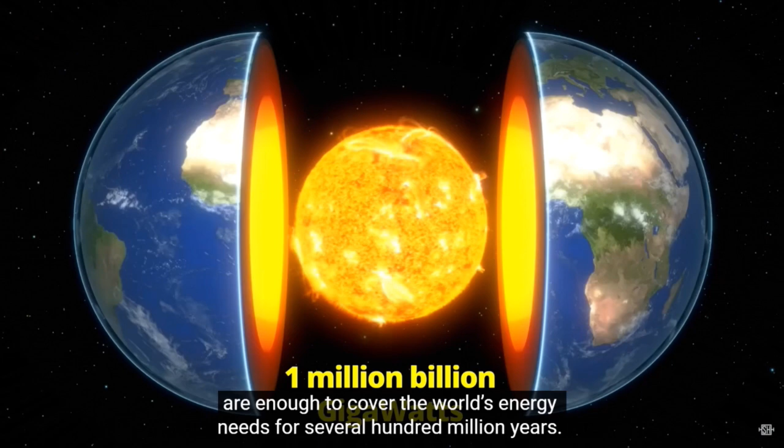Let's have a look. The amount of energy that resides in Earth's crust in the form of heat is staggering. Geoscientists estimate that the total energy reserves in the upper 10 kilometers of Earth's crust are enough to cover the world's energy needs for several hundred million years.

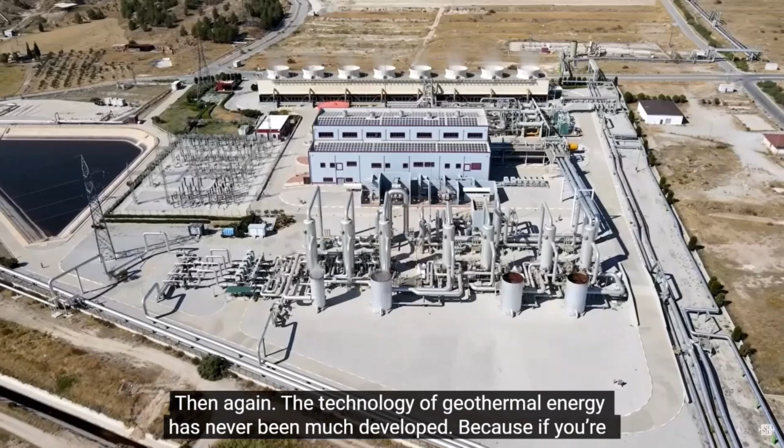The major problem with geothermal energy is that drilling is really expensive, and the deeper you want to drill, the more expensive it gets. That's why, at the moment, geothermal energy is commercially viable only in places where the heat isn't too far down. The technology of geothermal energy has never been much developed, because if you're drilling already, you might as well drill for oil or gas and use that to generate energy. Oil and gas has become somewhat unpopular recently, and now the technology of geothermal energy production is receiving a close look. There's been so little done that easy gains can still be made.

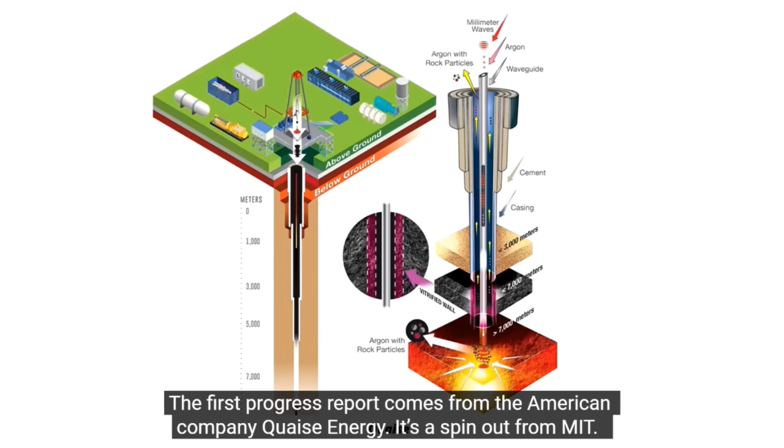The first progress report comes from the American company Quaise Energy. It's a spin-out from MIT. They just added another $21 million in funding for their microwave drilling system and say that they want to begin in the fall to test it at a geothermal site in Marble Falls, Texas.

Their aim is to drill really deep to places where it's so hot that water becomes supercritical. At supercritical temperatures, water can transport much more energy, and that makes power plants much more efficient. They want to reach such depths by combining a traditional rotary drill with a millimeter wave laser. They claim that this way they'll be able to drill 20 kilometers deep in just 100 days, and that with their technology they could reach supercritical temperatures at 90% of locations across the globe.

If that was right, it'd basically solve our energy problems. I strongly doubt that this is going to work, seeing that so far supercritical wells have all either collapsed or blown up. Then again, it's not any crazier than what fusion startups promise, and certainly way deeper.

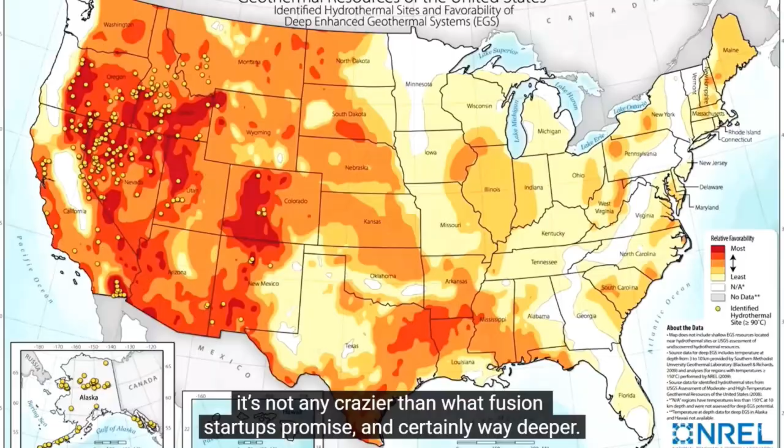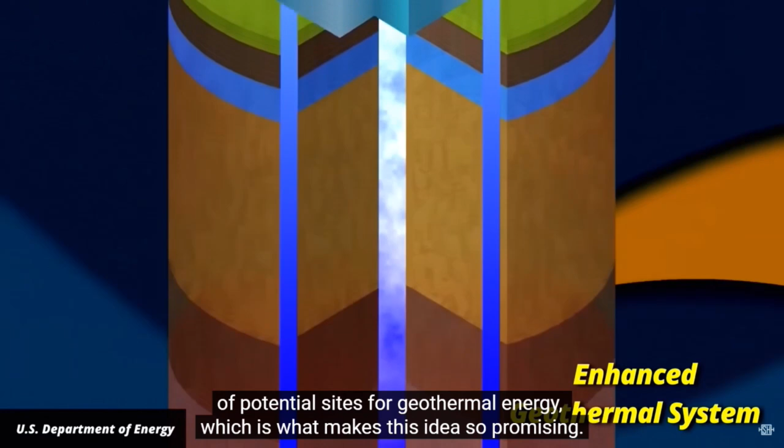The United States has a lot of potential for geothermal energy, especially in the West, so it's maybe not so surprising that our second news also comes from the USA. Earlier this year, the American Department of Energy, DOE for short, selected two pilot projects to test what is called an enhanced geothermal system. Usually, geothermal energy systems rely on naturally occurring hot water reservoirs. The issue is that these don't occur all that frequently. The idea of enhanced systems is to drill into hot rocks, push in water, let it warm up, and extract it elsewhere. This could vastly increase the number of potential sites for geothermal energy, which is what makes this idea so promising.

One of the projects that the DOE is financing is led by Fervo Energy and will be situated in Utah, where they already have a test site for enhanced geothermal. The test site exceeded expectations in drilling rates and cost less money than projected, which is really quite something. The new project now wants to build on the knowledge that they gathered.

The second project the DOE is financing comes from a fossil fuel company, namely Chevron. They have announced that they want to build a small test plant in Northern California.

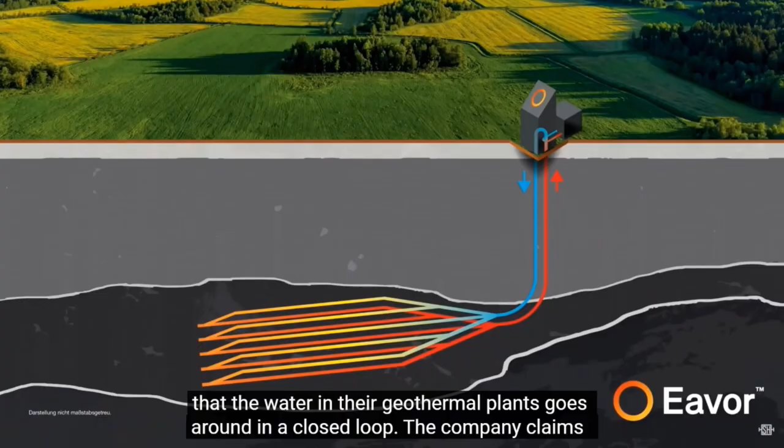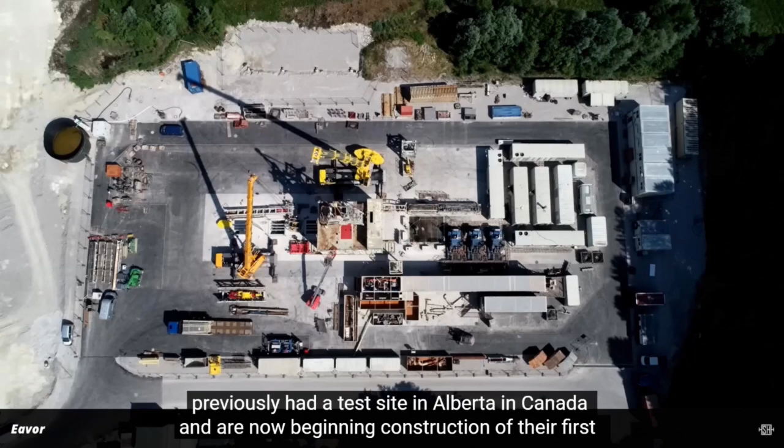On the opposite end of things is a plant so modest it makes you wonder why it hasn't been done a century ago. It comes from the Canadian startup Eavor. Their innovation is that the water in their geothermal plants goes around in a closed loop. The company claims that their system is so efficient that it can generate gigawatts anywhere in the world. They previously had a test site in Alberta, Canada, and are now beginning construction of their first commercial scale plant near Munich, Germany.

You might think that closed loop systems are not exactly groundbreaking new tech, and that's right, but conventional geothermal power plants are open-loop systems, using naturally occurring reservoirs of hot water or steam. So you see, there are easy gains to be made because this technology has been so underexplored. In my mind, geothermal is the dark horse of the race to clean energy. Yes, at the moment solar and wind are leading, but geothermal might catch up and leave everyone in the dust. And who knows, maybe we even get a few extra volcanoes.